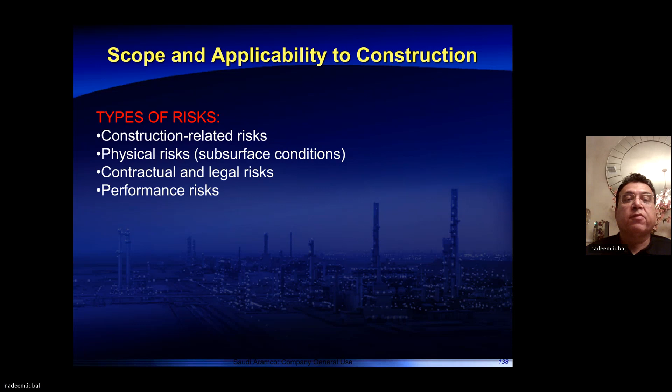Scope and applicability to construction types of risk. There are construction related risks: physical risks, which are subsurface conditions, contractual and legal risks, performance risks, economic risks, political and public risks. You see, there could be physical risks, meaning subsurface conditions, implying that once the contractor gets the project and has to, for example, construct a refinery on a site, the contractor does not know what the subsurface conditions are. Are there any rocks under the surface? Are there any other hidden challenges? So these are physical risks.

Contractual and legal risk. There are contractual obligations. So those are also considered as a risk because the contractor has to comply with those contractual obligations. Performance risk. There is a risk involved that the project, once it's completed, may not perform up to the specifications. So that is another risk. Economic risks. The economic risk means that, let's assume the refinery has been built, but the global economy is down. So the cost of the refinery might not be recovered. So there's a risk involved over here.

Political and public risk, that risk is also there. There could be public unrest, there could be political changes in the country, and in those scenarios, the projects could be impacted. So all these are the different types of risks.

Here is an example of the risk register. In a risk register, you have a risk title, risk description. What are the risk causes? You mention them over here. What would be the consequences of those risks and how you are going to treat those risks? For example, for the company Saudi Aramco, one of the risks could be Saudi Aramco manpower shortages, meaning manpower shortages to meet the portfolio demands. What causes that risk? There's not enough qualified manpower in the market. There's an unmatched skill set. The skill set is not there.

What is the consequence? Well, if there are not enough qualified people, there will be high cost of the projects because you will have to pay more to the employees. There could be potential project delays because of the lack of manpower. So what's the treatment? Establish a recruiting organization headed by a formal manager and full-time staff. So you set up a recruitment organization and you aggressively pursue your recruitment efforts. So these are examples of the different risks, and this is called our risk register.

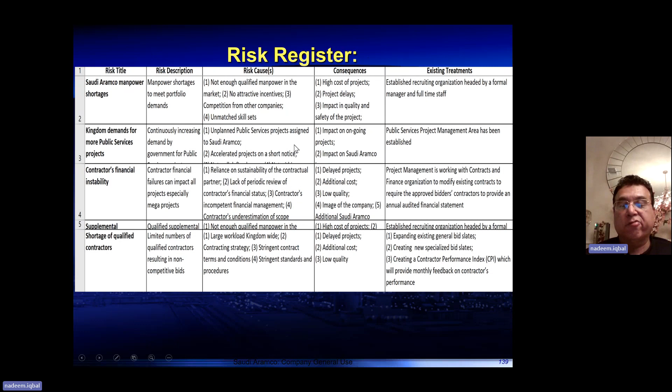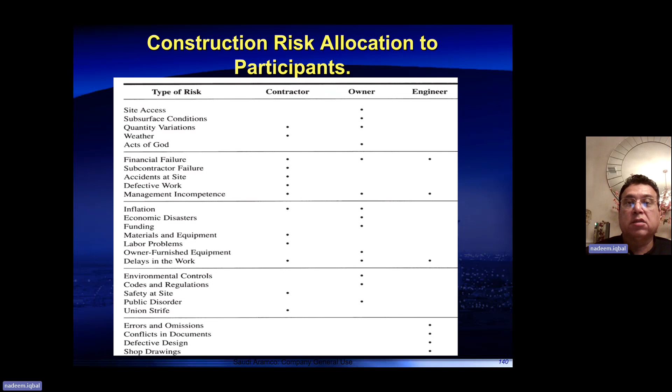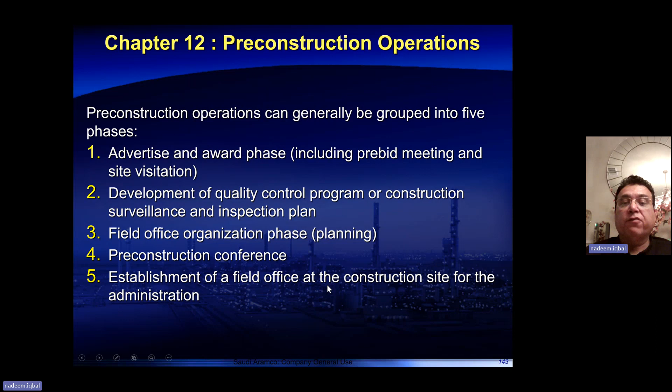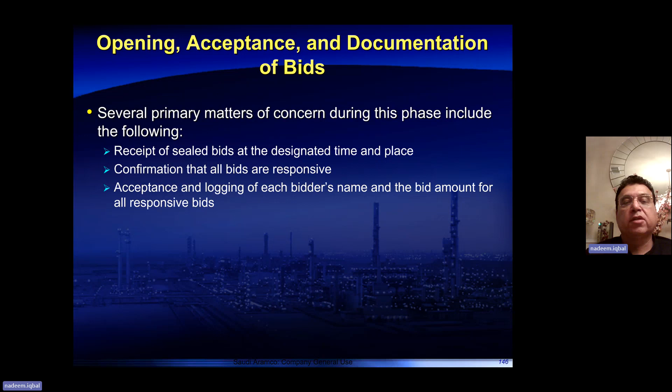Opening, acceptance, and documentation of bids. Several primary matters of concern during this phase include the following. Receipt of sealed bids at the designated time and place, confirmation that all bids are responsive, acceptance and logging of bidder's name and bid amount for all responsive bids, summary of all line item prices for all unit price bids. So at this phase where you are opening and accepting the documentation, the contractors submit their bids in sealed envelopes. There's a confirmation provided to the contractor that their bid has been received.

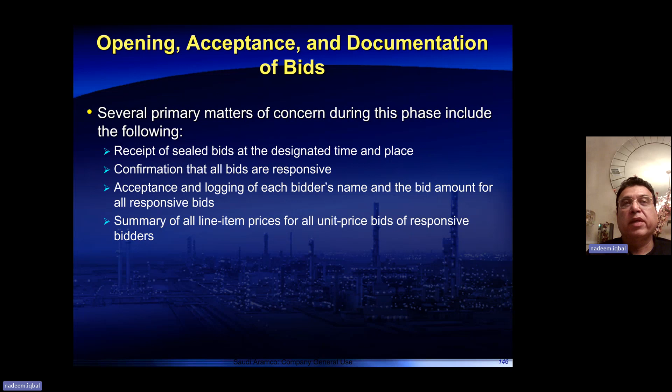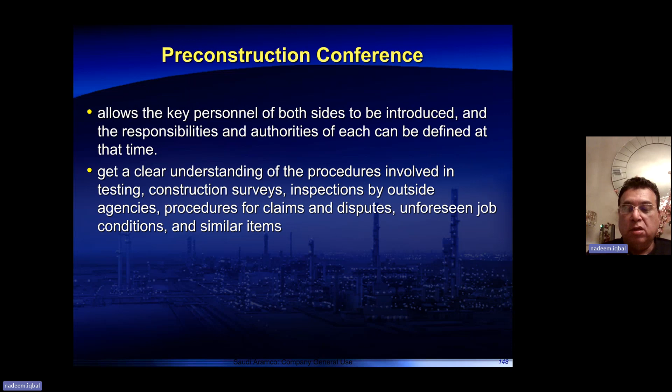Pre-construction conference: it allows the key personnel of both sides to be introduced, and the responsibilities and authorities of each can be defined at that time. It's like all the stakeholders meet and greet each other, to get a clear understanding of the procedures involved in testing, construction surveys, inspections by outside agencies, and procedures for claims and disputes. So all the stakeholders meet and discuss what the processes and procedures would be.

Key dates. The resident project representative should note on the field calendar every date that has special significance on the project, whether it is for tests, special inspections, payment requests, due dates, delivery dates, or other important milestones. So all the key dates should be on the field calendar. Every date should be there.

Listing of emergency information: a list of all key personnel of the owner, the engineer, and the contractor to be contacted in case of emergency. So that list of emergency information should be established and kept handy with the company representative or the project management team representative.

Starting a project: the notice of award does not authorize the start of construction, because no work is supposed to start until after the owner-contractor agreement has been signed by both parties. This is very important. Just the notice of award, meaning a contractor has been notified that they have been awarded the contract, does not mean that the next day the contractor should start working on it. No, until both the owner and the contractor have physically signed the agreement and the contract, construction work should not start.

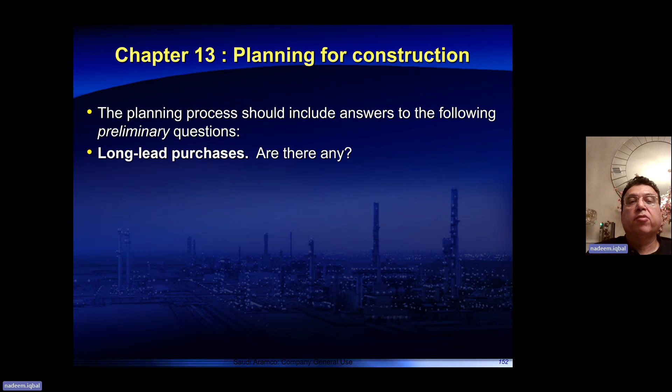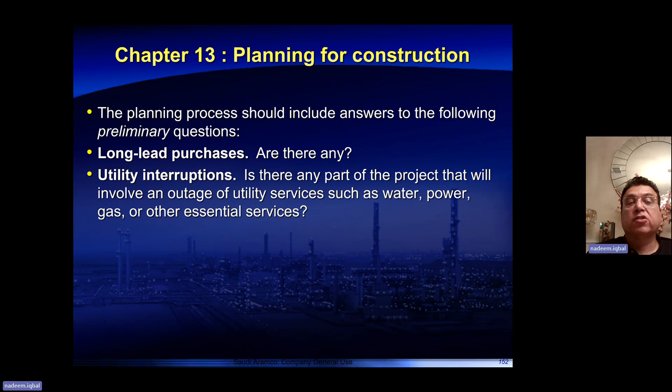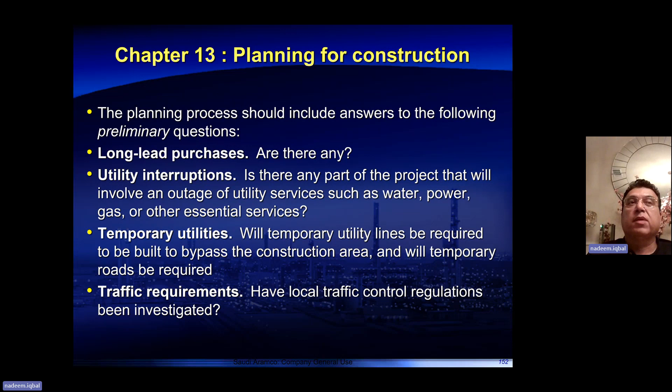Planning for construction. The planning process should include answers to the following preliminary questions. Long lead purchases: are there any long lead purchases that could be made at this point? Utility interruptions: is there any part of the project that will involve an outage of utility service, such as water, power, gas, or other essential services? Temporary utility: will temporary utility lines be built to bypass the construction area? So all these things are part of the planning. Traffic requirements: when you bring the material over to the site, are there any special traffic requirements?

Other contractors: will other contractors be working in the same area? If other contractors are working in the same area, then you need to consider what would be the impact on the manpower, the resources, the traffic, and the material available in the market. Time for construction: is the time allowed to complete the project adequate for the location and the season? Is the time realistic?

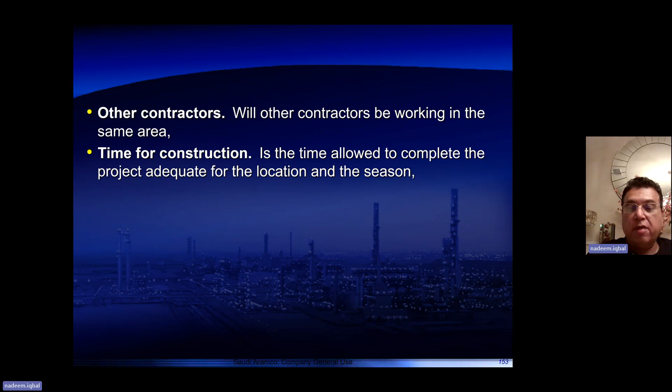Construction schedules are related to building costs. Unrealistic completion dates coupled with exorbitant liquidated damage charges against the contractor for failure to meet such requirements impose severe financial burdens and undeterminable risks on the contractor. So the completion dates should be realistic, because if the contractor does not follow a realistic completion date, that would result in a failure of the project.

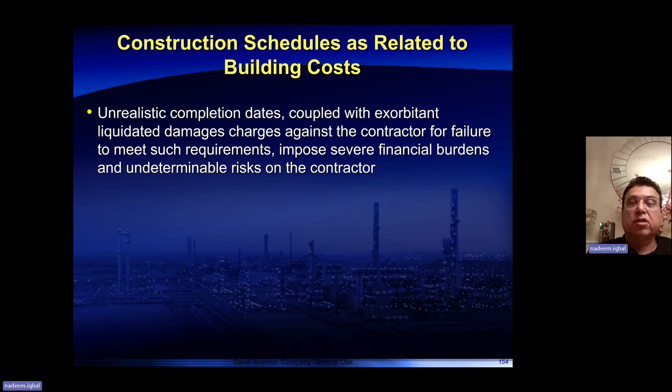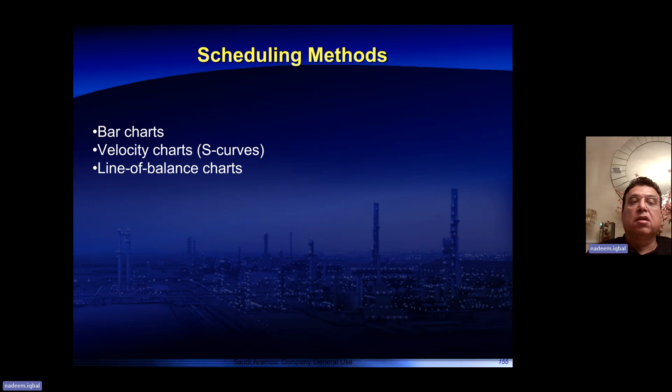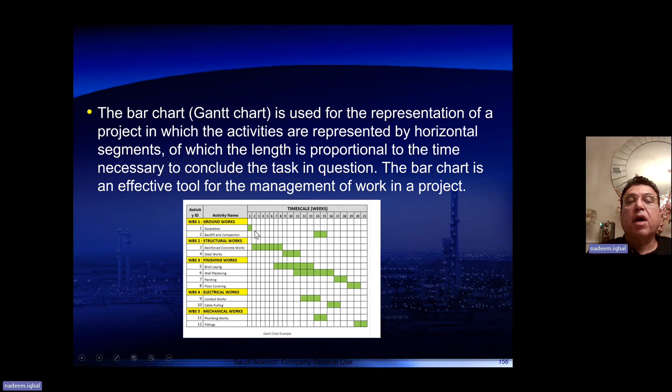Scheduling methods could be different. These are different scheduling methods: bar charts, velocity charts, which are also called S curves, line of balance charts, and network diagrams. The bar chart or Gantt chart is used for the representation of the project in which the activities are represented by horizontal segments, like excavation and backfill, of which the length is proportional to the time necessary to conclude them. So the time required for excavation is one week. The bar chart is an effective tool for management of the work in a project.

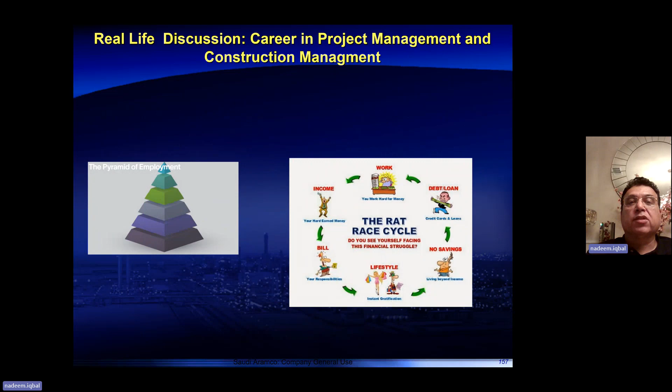So, real life discussion: career in project management and construction management. How can you become a millionaire working in the project management or construction management industry? These are the different options. Get a job and get an annual increment every year. Start your own construction company. Just keep working hard and hope to get there. Think about it. What's the best way to be successful in the project management or construction management industry?

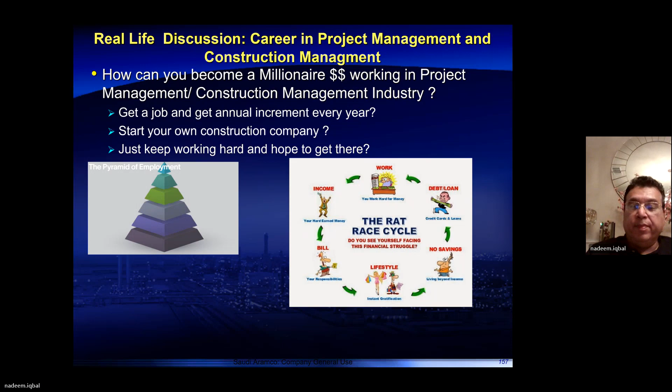That's all for now, and we'll discuss the rest of the slides next time.